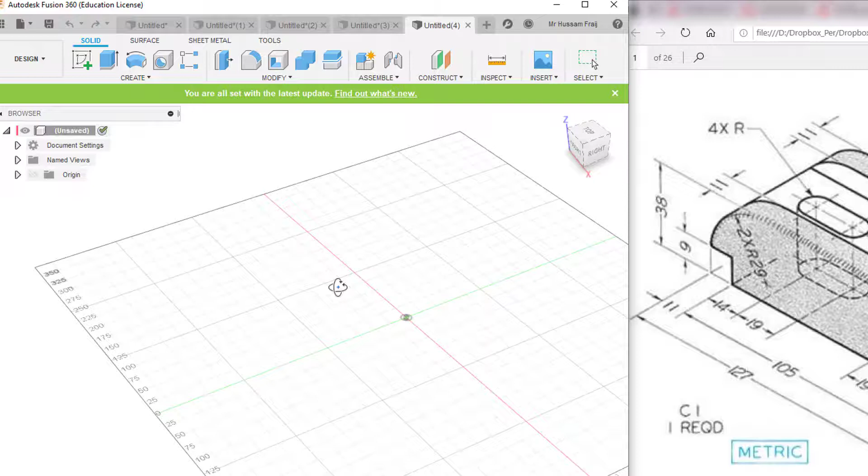Hello everyone, this is Fusion. Once you open new, it will ask you to create a sketch.

Choose the appropriate work plane, as an example front. Let's say front view, and we create sketch.

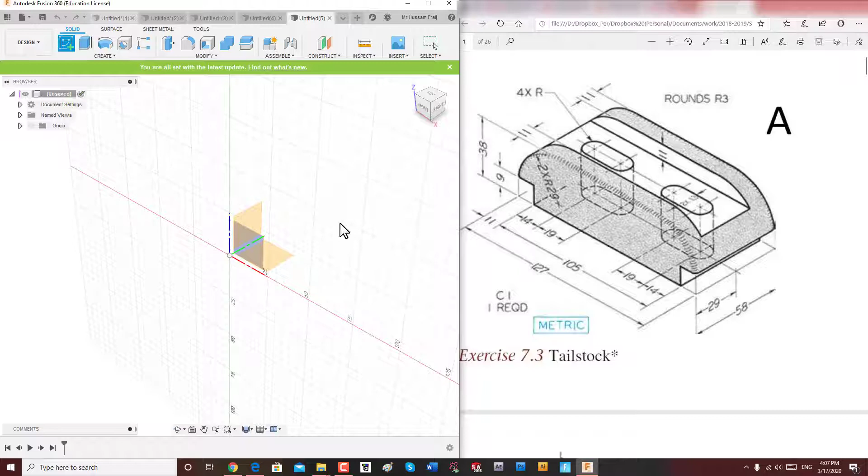Then similar to Inventor, we'll start with rectangle. We draw rectangle, as an example 2 points.

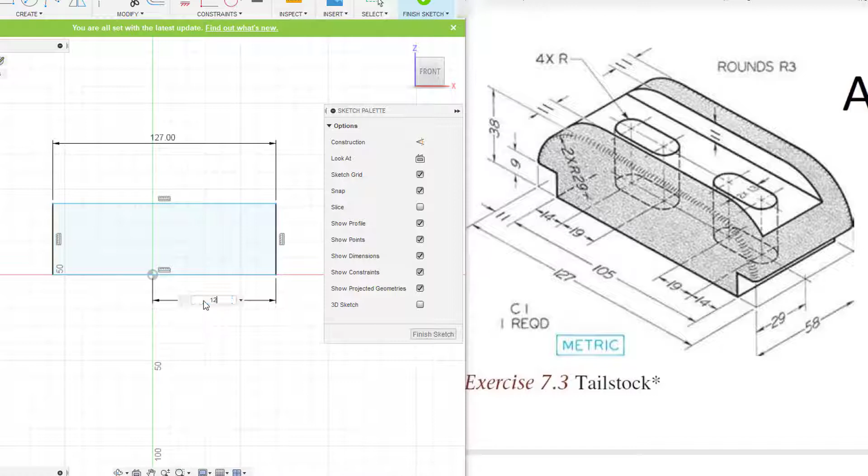Then we will go to dimensions. This is dimension, and we'll add dimension similar to Autodesk Inventor. The total length is 127, and you can click dimension from the middle to the end, 127 over 2, and the total height is 38.

Then for the bottom you can add constraint, make this line on the center, that's it, coincident constraint, and then you can add the sketches.

You can add this cut 9 by 11, 9 by 11, so you can add 2 rectangles from each side and add the necessary dimension.

From both sides, as you can see, 11 by 9.

After that we will add the fillet. The radius is 29, 2 by 29 from each side. So from here to here it's 29, and from the other side also 29.

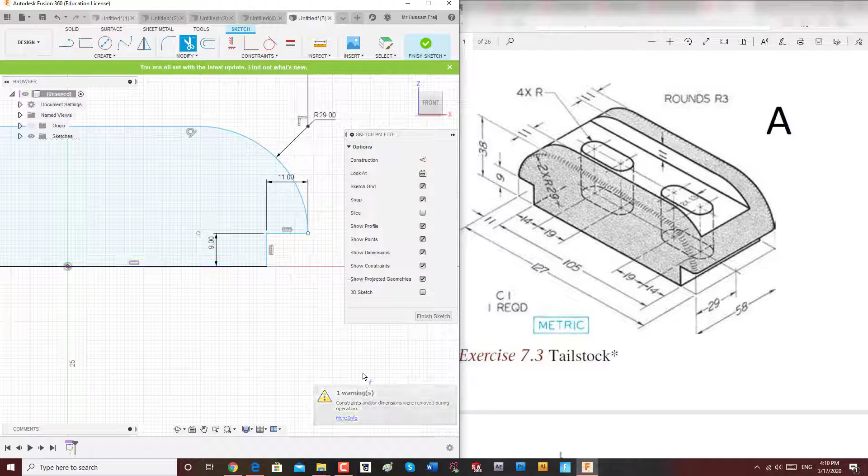This error means you lose the dimension or the constraint, so you have to add dimension or constraint. So we will add dimension and the constraint. So this is 38.

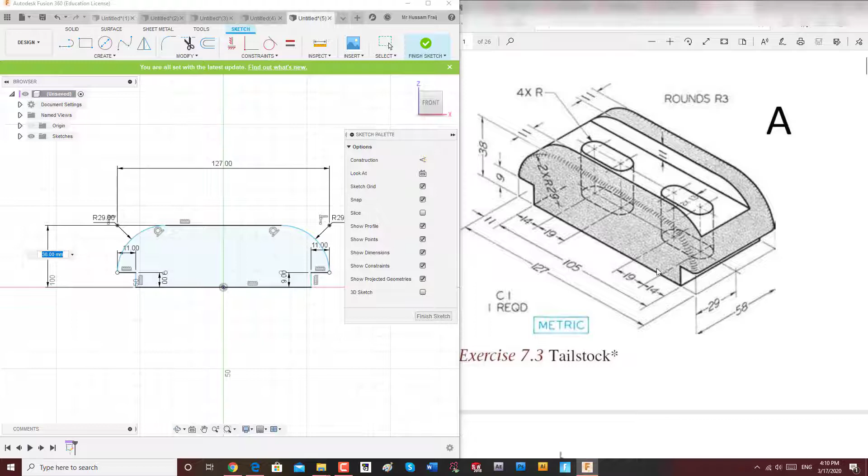Okay, that's it for now. After you finish the sketch, you have to click on finish sketch and extrude. As I said, very similar to Inventor, and you have to specify the value that you need for the extrusion.

So we need 58. You can choose, you want it middle, you want it one side. I would prefer to divide the value over 2.

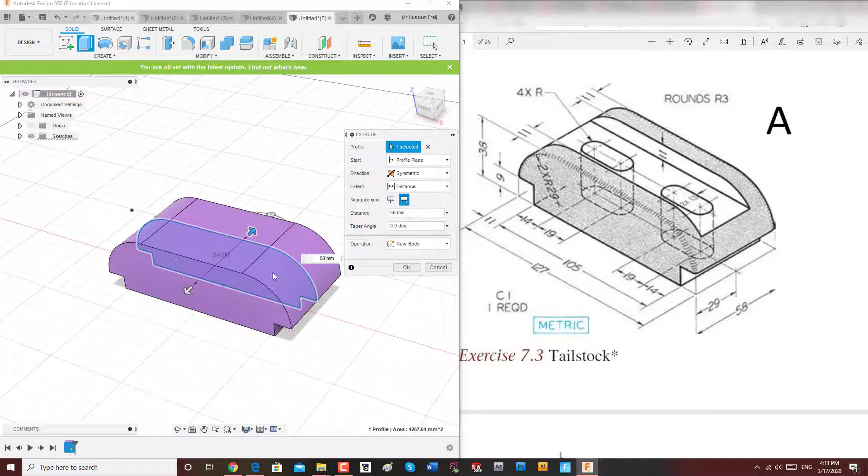Okay, so here we have our 3D model. Now we will make this one 11 by 11, this groove, the cut in the middle.

We will draw rectangle. It's not important, any dimension, we will add the dimension later. Then from the side we will add 11, so this is 11, and from the other side also the same, 11.

That's it, finish. We need to make extrude for the middle part, this one, and this one.

Extrude down, we flip the direction, and we will make it cut this time. See the option, we change it to cut, move it down, and as you can see here, the value is -11. Finish.

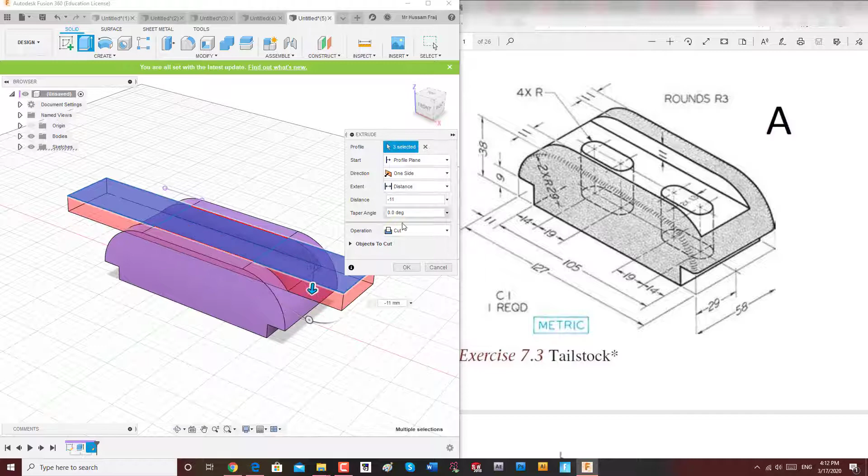Then we get this shape. Okay, we will add...

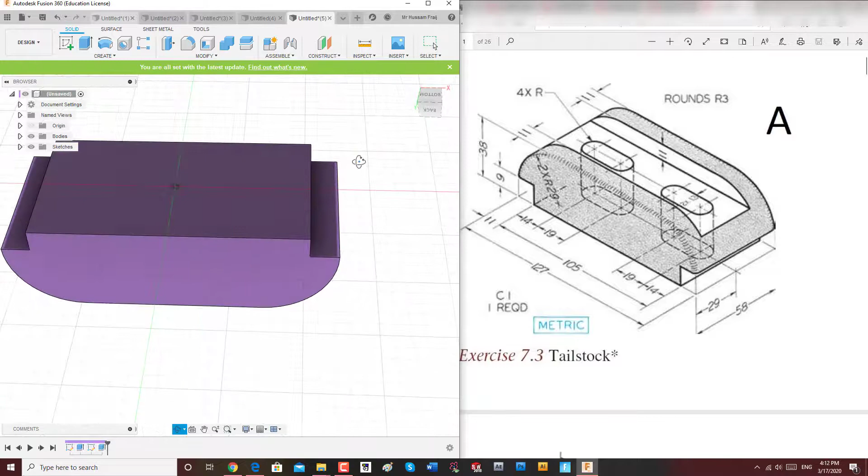Now we'll add the slots, 2 slots we have, 14, 19, we have given dimension, arc, rectangle, slot.

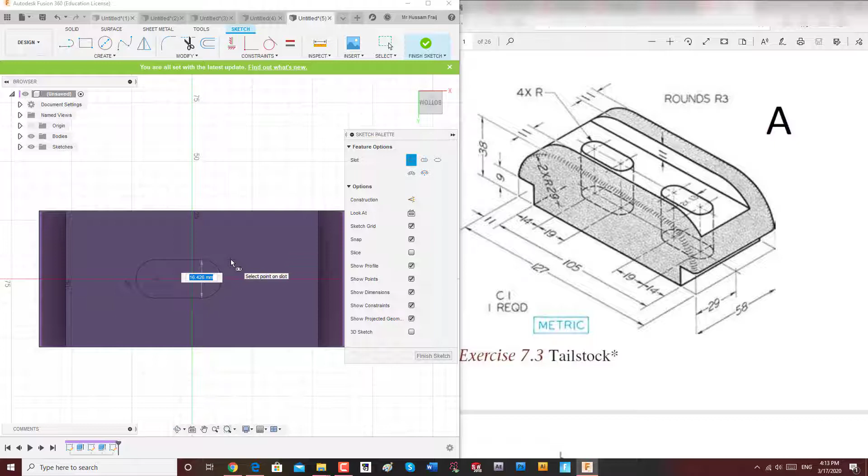The first one, we'll draw the slot. We choose the dimension 19, and we choose the depth 13.

Now we'll add dimension because we want it to be from one side 14. This dimension already given, we need it from this edge to the center. This is 19.

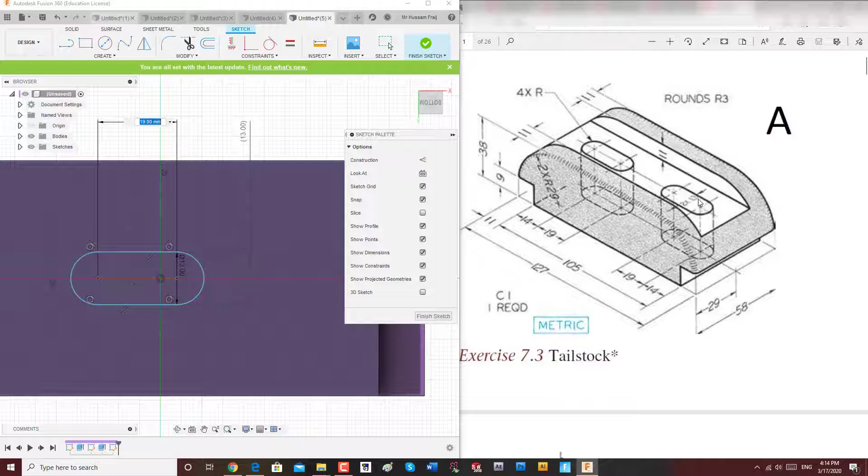And we need it from the side, which is 14. So after we finish 19, from this edge to this edge 14.

Now we can create another slot, or we just can mirror this by adding another line, so we can make mirror around it. We'll search for the mirror command, it's not on the modify, it is on the create tool.

So mirror, we choose all this profile, select mirror line, this mirror line. Now we have two of them.

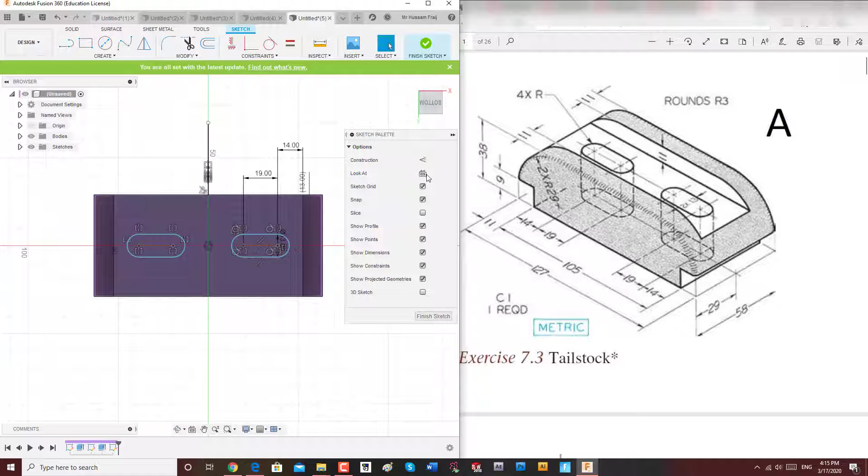After that we will do the same, stop, finish sketch, and we'll do extrude. This one I want it to be cut.

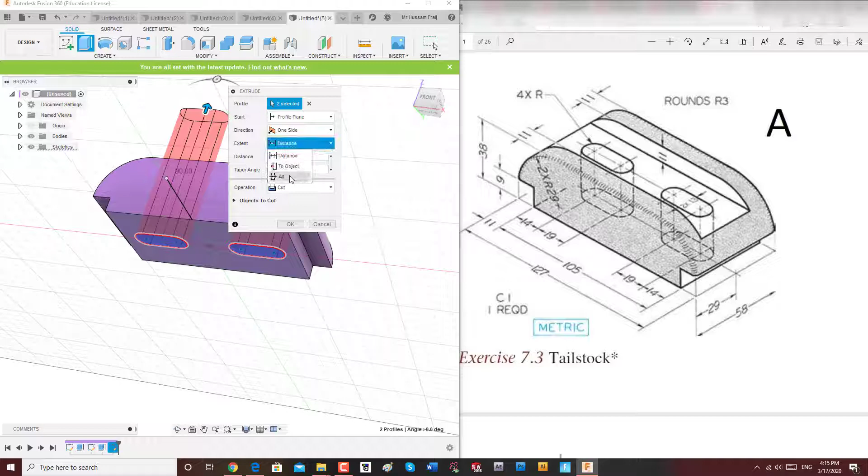The distance is other side, and I want it to be all the way through, so I can choose from the distance all the way through, or I can specify a value if needed, but through all is better. Now I added the cut, so here is the part.

Yes, it's complete. Round 3, I don't prefer to add round. You can add it at the corner here, round 3 all around, but I don't prefer to add it because sometimes this fillet will make it misleading in your drawing.

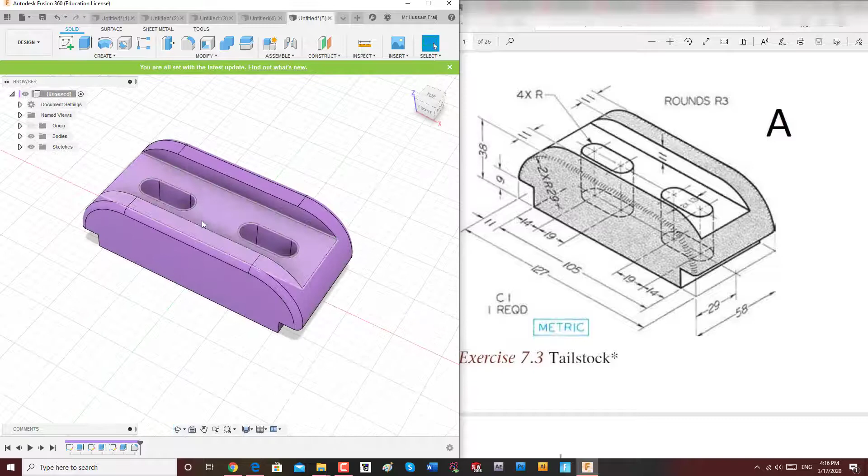When you are making engineering drawing, this fillet will cause some problems. But if you want, you can add them as you wish.

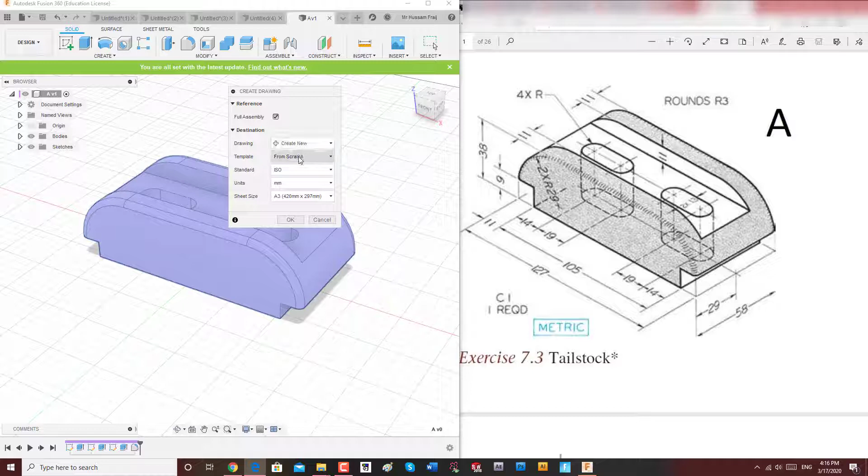Go to drawing, from design, if you are using metric, keep it as millimeter. From scratch, A3, and here we go, we have the front view.

The scale is, we can make it 1, we can increase it more, 1.5, or make it less. Okay, so this is our front view.

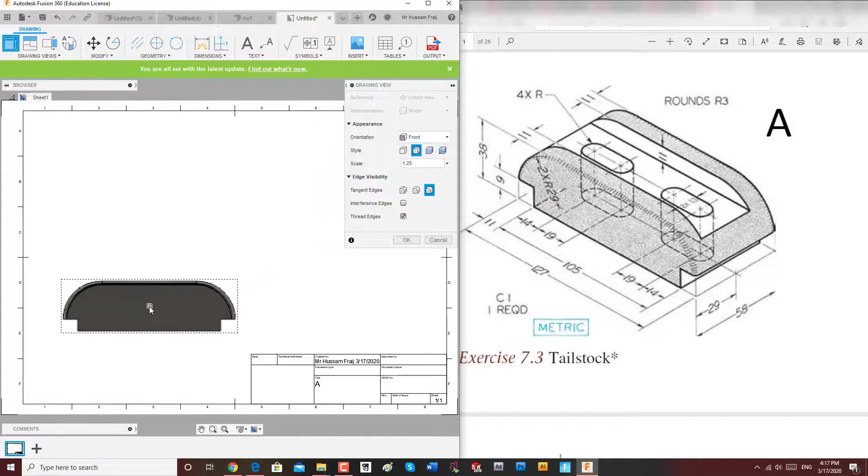I can choose it shaded, I can choose it hidden, or visible edge only without hidden. So here is the front view.

Then projected from the front, I can project top, right side.

Then I will project it to isometric view. I will go to isometric view.

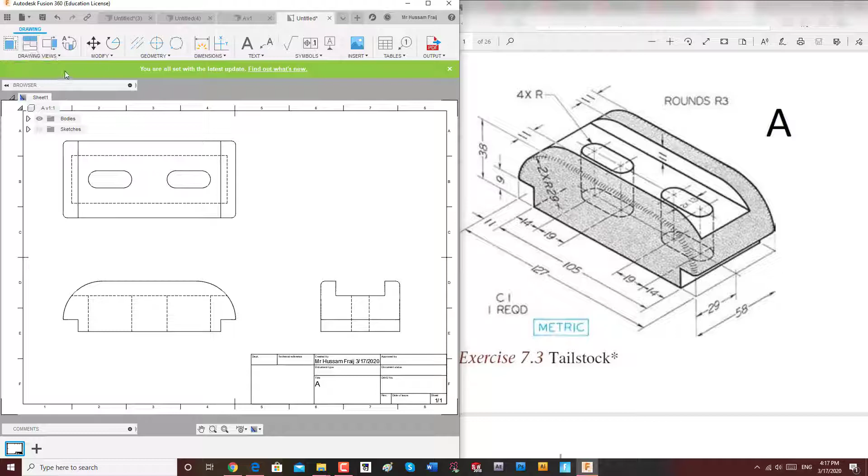I can choose from here the view that I like, and the size that I want. You can make it shaded so you can see the colors if you wish. And here we go.

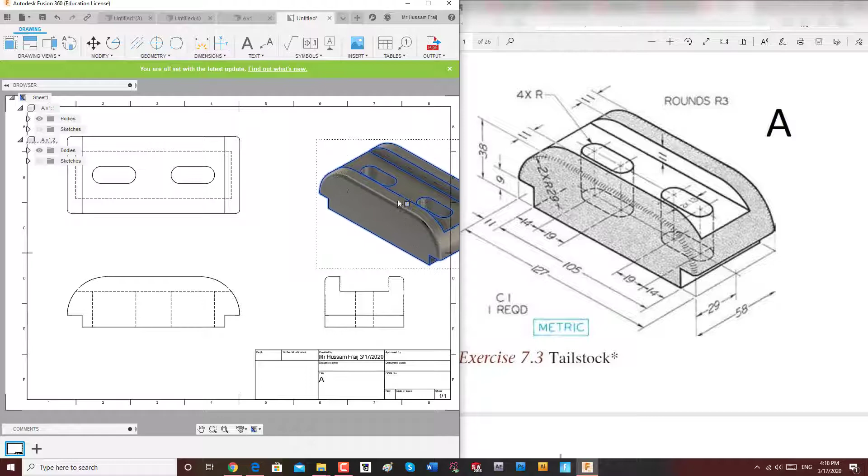Click on the square in the middle, then you can move the part, but you have to be careful because sometimes it goes away. That's it.

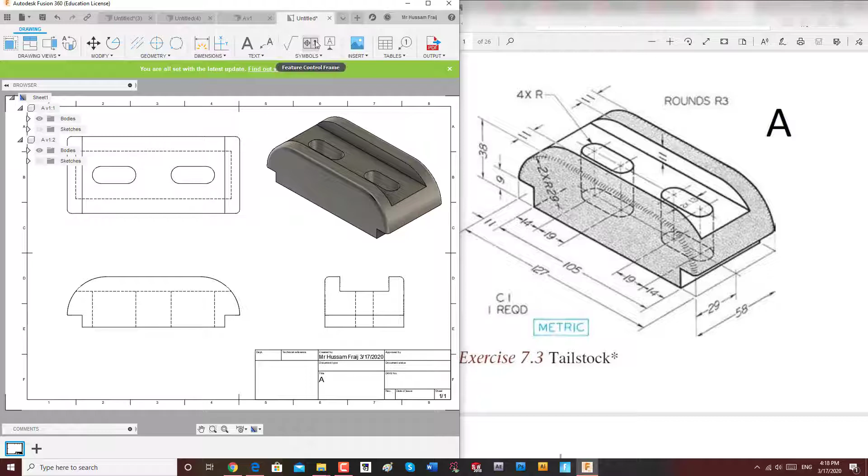Now we can add dimensions from the tabs. You can see in the top menu, you can see dimensions. We can add dimensions. Similar to Inventor, if you draw everything correctly, the dimension, you don't need to edit or modify anything, the dimension will automatically be generated.

So we don't need... this is the dimension. We can add now the dimension.

As you can see here, we added the dimension, but the font of the dimensions is small. We can increase the font. I will show you how to increase the font. You can add radius dimension.

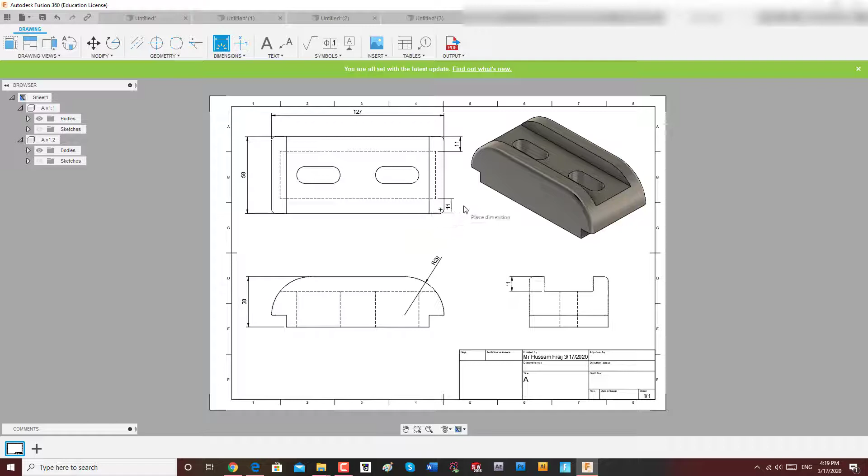This is just a fast overview about the dimensions. I just want to show you how to add dimensions the correct way using Fusion.

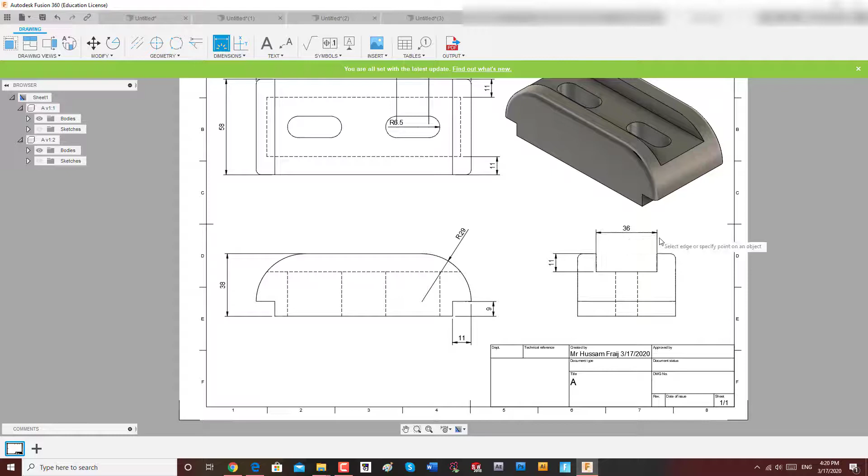Okay, so here is the fillet.

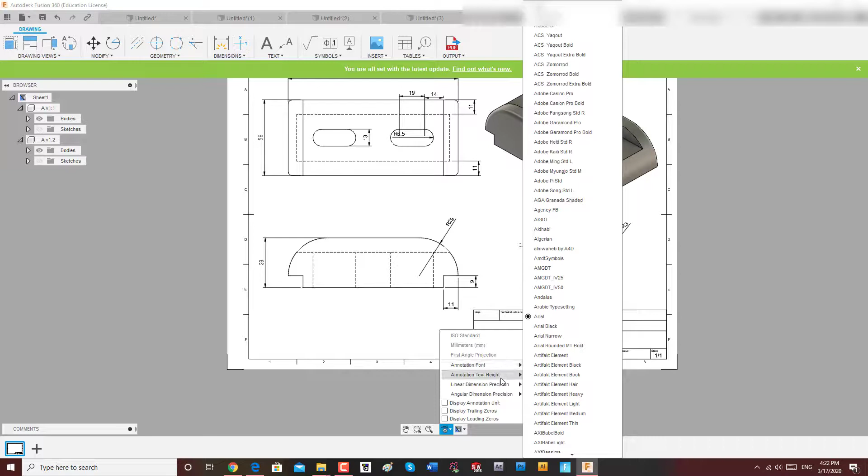If you want to increase the size of the dimension, go down—oh, not this menu, this menu—and go to annotation text height. This is if you want to change the font. Here's the text height, and change it as an example to 5. See, now it's better.